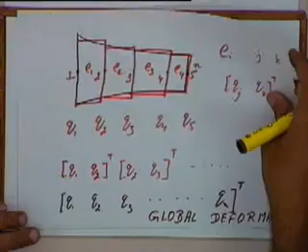So we will have one vector or one matrix which we will call as the global deformation matrix. So this matrix we will call it the global deformation matrix.

So if we have a set of elements like this, that is E1, E2, E3, E4 and so on, and let us say if we have m elements and n nodes, our global deformation matrix would be given by Q1, Q2, so on till Qn. This is our global deformation matrix.

Now for this matrix, for this set of finite elements, we can say that the element E1 is connected between nodes 1 and 2, the element E2 is connected between nodes 2 and 3, E3 is between 3 and 4, and so on.

So, let us say, this table is defining the adjacency relationship between elements and nodes. It is defining the position of different elements and that of the different nodes. We will be making use of this table later on.

If we take up the first element and we write down the stiffness matrix for this, the stiffness matrix for the first element is E1 A1 by L1 multiplied by 1 minus 1, minus 1, 1. Similarly the stiffness matrix for the second one would be E2 A2 by L2 multiplied by 1 minus 1, minus 1, 1, where E1 is the Young's modulus for element 1, A1 is the area of cross section for the first element, L1 is the length of the first element.

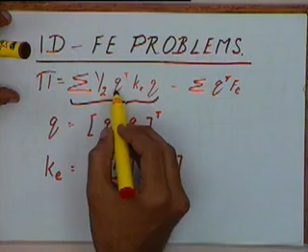And if you look up this term, the first term Q transpose Ke Q, if I expand it out, that is I multiply this matrix by Q transpose and Q, that is Q1, Q2, the terms Q1 and Q2 will be multiplying these two terms and then these two terms, because this will become a row matrix multiplied by this column and then multiplied by this column.

The product of these two will give me a row vector, and that row vector when multiplied by this column vector Q is going to give me a single potential energy term, or the strain energy term. So now what we will do is, instead of writing the individual matrices like this, I will write a global matrix which will look something like this.

What I have done is, if I look at this table, the element E1 is defined between nodes 1 and 2. I have a total of n nodes, so I will take an n by n matrix.

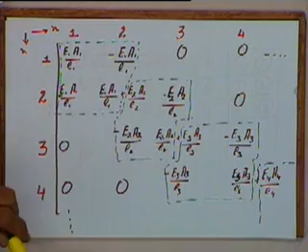And so on, I will take up the third element. The third element is defined between nodes 3 and 4. So I will take locations 3 and 4 of this matrix, and place the four terms for the element stiffness matrix for element number 3. This way I will fill up all these elements, the remaining places will get a 0. And this matrix is what we will call the global stiffness matrix.

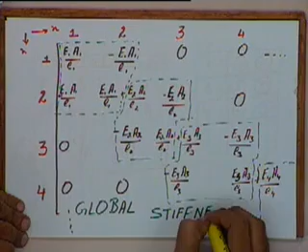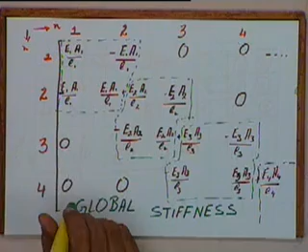Any question up to this point? How I have made this global stiffness matrix?

Now if I look at the global displacement matrix, which is this one, and the global stiffness matrix, which is this one, and if I write down the expression half of Q transpose K Q, where Q transpose is the global displacement matrix and K is the global stiffness matrix.

Basically what I am doing is I am taking this matrix, and I am pre-multiplying it by Q transpose and post-multiplying it by Q. What is Q transpose? It is a row vector containing Q1, Q2, Q3 till Qn. So this is going to be a row vector which looks like Q1, Q2 till Qn. This is multiplied by this huge matrix that I have written.

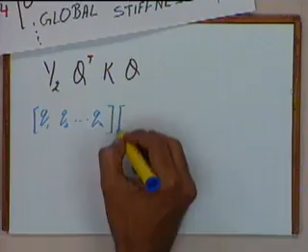In this place I will get this complete matrix, the global stiffness matrix, and this is multiplied by a column Q1, Q2 till Qn.

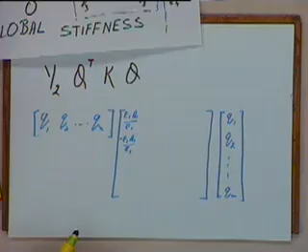Now if I look at this, my first two terms here contain E1 A1 by L1 and minus E1 A1 by L1, these two terms. All the other terms are zeros. So when I multiply this row by this column, I will get terms corresponding only to these two.

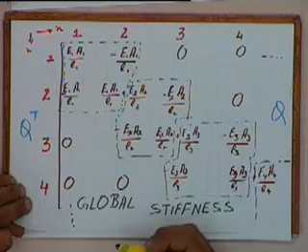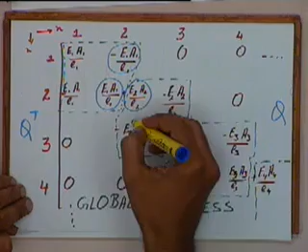Similarly if I take up the next column, I will get terms corresponding to this, this, this and this. Q1 will be multiplied by this, Q2 will be multiplied by this as well as by this, and Q3 will be multiplied by this. Then the product of this row with this column is going to be multiplied by Q1. You have to look at this operation slightly carefully.

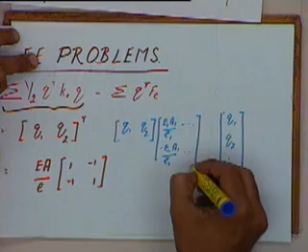And if I compare this with the expression half of Q transpose into KE into Q, that means half of this row vector multiplied by this column vector. I will again get Q1, Q2 multiplied by these two terms, and again that term will be multiplied by Q1. You can look at Q1, Q2, this would be multiplied by E1 A1 by L1, minus E1 A1 by L1. And we have another couple of terms over here, and this will be multiplied by Q1, Q2 as a column vector.

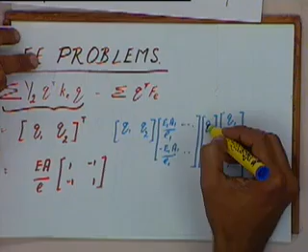So these two terms multiplied by these two, again multiplied by Q1, that is what will be my first term, and we will get the same term when I multiply this row by this column and then multiply that by Q1. Are you able to visualize that? Then what we are doing is I am summing it up over all the elements.

If the effect of this summation I am able to get directly by getting this global matrix, because if I take this row and multiply it by any column, let us say I multiply it by the ith column, and the ith node will be a part of some particular element, I will get the corresponding terms from this summation.

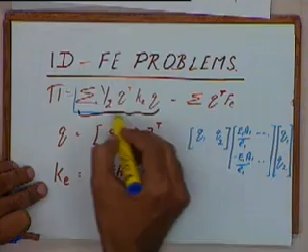Let us say if I take the element I, which is defined between nodes j and k, then the jth row and the kth row, and similarly the jth column and the kth column, these four terms will give me the terms corresponding to the element matrices.

So what I am saying is that this thing will be equal to sigma half q transpose k e q. So Ei is of the ith element. Again, what is Ei? The ith element. So the element Ei is defined between nodes j and node k.

If you look up this table, the element E1 is between nodes 1 and 2, E2 is between 2 and 3, and so on. So if I take Ej, or sorry Ei, that is between nodes j and k. Is that okay?

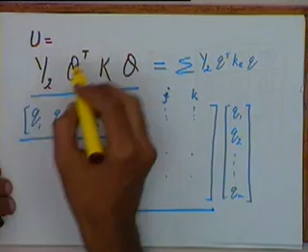So if I take any finite element formulation, any problem which I have defined as a set of finite elements, I can take each of these individual elements, get their elemental matrices - the element stiffness matrices and the deformations - and from these I can assemble my global equations, or my global expression by writing this term. This is equal to the total potential energy, strain energy in the system. U is equal to half of q transpose k q. This is the total strain energy in the system. Is that all right? Okay.

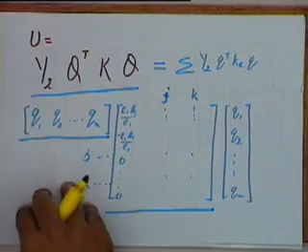Now the potential energy term consisted of another expression which is this q transpose into Fe. What we will do is, just like we have defined a global deformation matrix, we will define another term which is a global force matrix.

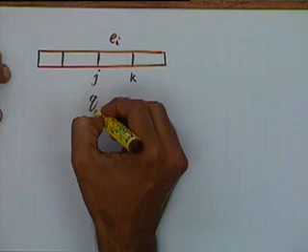So if we have a set of finite elements like this, let us say this is my element Ei between nodes j and k. The deformation of this is qj, the deformation of this is qk. We have written expressions for the Fe matrix, that is the element force matrix.

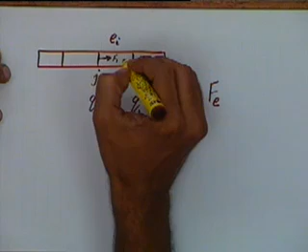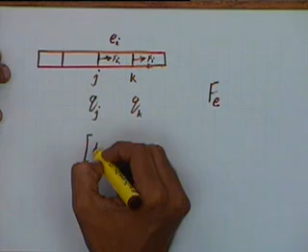What we said essentially was this element force matrix will consist of two forces acting at the two nodes. So this is, let us say, some force F1, or let me say Fi1, and this is Fi2. So the element force matrix for this would look like this: Fi1 and Fi2. This is going to be the element force matrix for the ith element.

So what we'll do is we'll define a global matrix in which, again, if I take my first element E1, that is defined between nodes 1 and 2, I will take the corresponding force terms for the first element and place them in locations 1 and 2. So F11 and F12. This is my element number 1, this is my node 1 and this is my node 2.

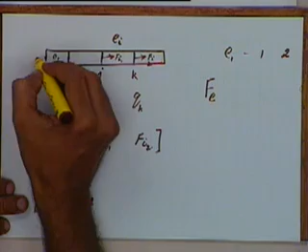This force is what I am calling as F11, and this force is what I am calling as F12. F12 is the force on the second node of element number 1. F11 is the force on the first node of element number 1. Fi1 is the force on the first node of element number I, and Fi2 is the force on the second node of element number I.

Okay, so if my element 1 is between nodes 1 and 2, and element 2 is between nodes 2 and 3, my second term here I will add F21, and the third term here will have F22.

This is location number 1, this is location number 2, and this is location number 3. Forces are also 1D. In the 1D formulation we assumed everything to be one dimensional. If you have a two dimensional element, we will see how to formulate that later on.

So here we talk about first node and second node, we don't say J and K. We have always been doing that. The first node here is node number J and the second node is node number K.

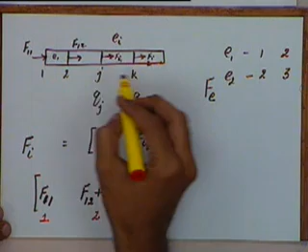If my first node is node number J, what I will do is I will take up the jth term over here, and in the jth term I will add Fi1. And in the kth term I will add Fi2.

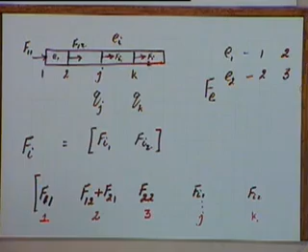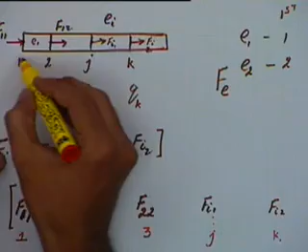See, the first and the second node, when I say this is my first node and this is my second node, this is what we refer to as the elemental numbering. Element has a local numbering which is nodes 1 and 2. These are the global node numbers. This 1, 2, J, K and so on, these are the global node numbers.

Now this global node number J corresponds to element node number 1 for element number I. That means for this element, this node number locally is 1 and this is local node number 2, but global number is J and K.

Okay, so when I look at the local matrices, in the local matrix, this is the first force element, this is second force element. In the global numbering, this will go into the jth location, this will go into the kth location.

This way what I will do is I will take up all my elements, and the forces coming on each of the nodes, the forces which are a part of the element force matrix, those forces I will place at these global locations. So at each of these n nodes I will get a force which will look something like this.

So if I have a set of forces like this, this matrix is what I call as my global force matrix. What I have basically done is I have taken up the force elements on each of the elements, the forces on the two nodes of each of the elements, and placed them on global locations. This matrix is what I call a global force matrix.

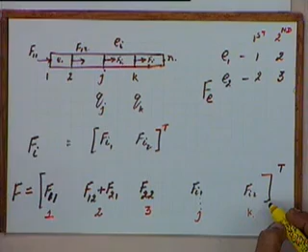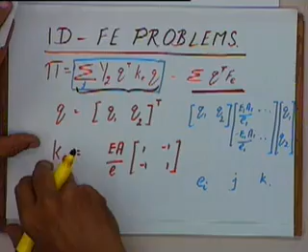And now if I look at this term, that is sigma q transpose Fe, you will find that this will be equal to Q transpose multiplied by F. How do we get that?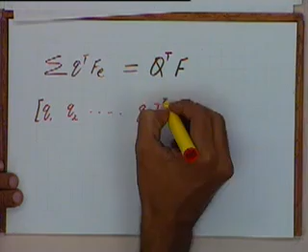This Q transpose is nothing but Q1, Q2 till Qn transpose. And this F would consist of F11, F12 plus F21, F22 plus F31, and so on.

What I have taken is element E1 defined between nodes 1 and 2, and element E2 defined between nodes 2 and 3, and so on.

So if I take this row and multiply it by this column, Q1 is multiplied by F11, Q2 is multiplied by F12, and these two terms are what I will get if I take the matrix Q1 F1, that means the Q matrix for the first element and F matrix for the first element. If I take these two and multiply them, I will get Q1 F11 plus Q2 F12.

Similarly, if I take up the second element, I will get Q2 and Q3 multiplied by F21 and F22. Similarly, if I take the third element, Q3 and Q4 will be multiplied by F31 and F32, and so on.

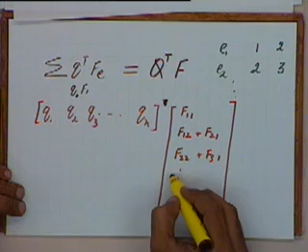The summation of all these terms is nothing but the Q transpose multiplied by F.

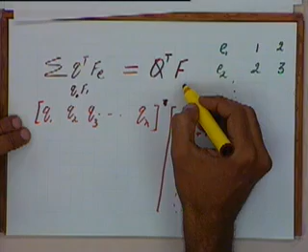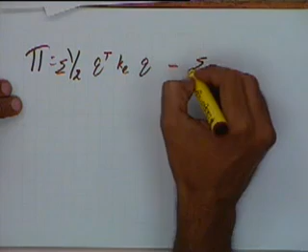So this way, by writing the global equation in this manner, the potential energy expression that I had earlier, I can simplify that to: pi equal to sigma half of Q transpose Ke multiplied by Q minus sigma Q transpose Fe. This is nothing but half of Q transpose K Q minus Q transpose F. This is the expression for the total potential energy in the system.

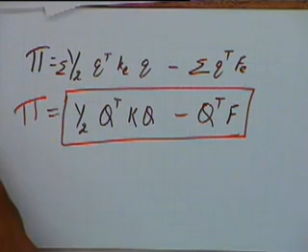And this has been obtained by writing the global deformation equation, global stiffness matrix, and the global force matrix.

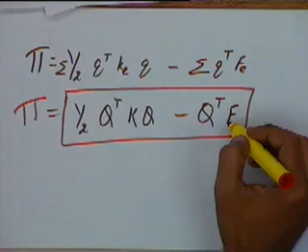Any questions up to this point?

Okay, a couple of observations about this global stiffness matrix. If you look at these element stiffness matrices, the first thing we notice is that they are all symmetric. 1, 1, minus 1, minus 1, 1, 1, minus 1, minus 1 - so all the element stiffness matrices are symmetric.

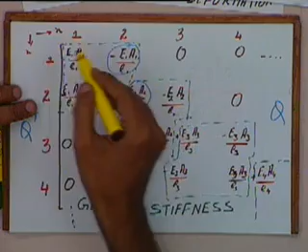If you see the method by which we have assembled the global stiffness matrix, we have retained the symmetry because the element stiffness matrices have been placed both as row as well as column terms. So if I take the ith column and the jth column, and the ith row and the jth row, an element defined between nodes i and j will come on the 4 symmetric terms. So the global stiffness matrix is also a symmetric matrix - K is a symmetric matrix.

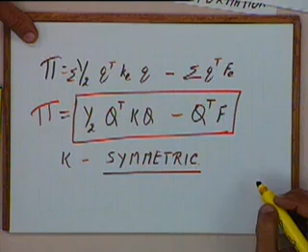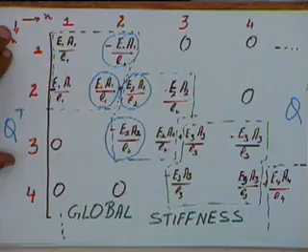The other thing we say is that if I have element 1 defined between nodes 1 and 2, element 2 defined between nodes 2 and 3, element 3 defined between nodes 3 and 4, and so on - that means element i will be defined between nodes i and i plus 1. If I follow this sequence, I will get only 3 terms in any row - the 3 consecutive terms next to the diagonal.

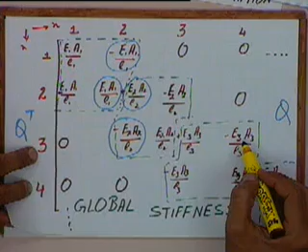If you notice here, element 1 is between 1 and 2, element 2 is between 2 and 3, element 3 is between 3 and 4. If I take up the third row, I will find non-zero terms only in locations 2, 3 and 4. So this global stiffness matrix will be a banded matrix with a bandwidth of 3. So if I take numbering like this, I will get a banded matrix, and the bandwidth will be 3 in this case - the width of the band.

However, if I don't do my numbering like this - say my element number 1 is defined between node number 1 and 10 - that means I am taking a set of elements like this. This is my element number 1, and instead of saying this is between nodes 1 and 2, I say this is 1 and this is 10. And this is maybe some other number 15, and this is node number 2, and so on.

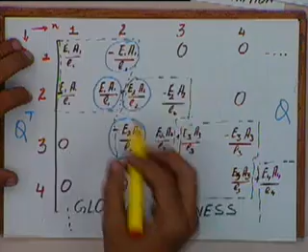Then what would happen is the terms for the stiffness matrix of element 1 will go in location 1 and 10. These 4 terms won't come like 1, 2 and 1, minus 1 and minus 1, 1. One will come here, and this term will go in the 10th column, and similarly this term will go in the 10th row, and this term will go in location 10, 10.

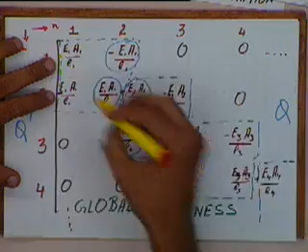And if that happens, this will no longer be a banded matrix. This matrix will then become non-banded, but will still be symmetric. But this will become a sparse matrix. There will be a term here and a term in the 10th row, in the 10th column, but all the terms in between will be 0.

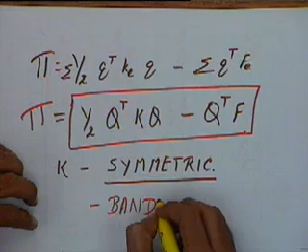So the global matrix that I have - this K is either banded or it is sparse. And whether it is banded or sparse depends on the numbering that we have done, how we have numbered the nodes. So numbering becomes very critical on whether it is a banded matrix or sparse matrix. It's basically critical because for banded matrices we can get very efficient methods for solving them, while if it is not banded and we have a very large system of equations, the system can become complex. So the numbering of the nodes is very critical.

The mid-terms are 0. What do you mean by mid-terms? I mean between 2 to 9.

Let's say this is node number 2 and this is node number 9. No, E1 is defined between nodes 1 and 10. So corresponding to E1, for the nodes 2 and 9, all the elements will be 0. That's why it's sparse.

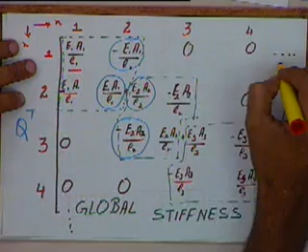Corresponding to E1, I don't understand what you mean. So if I look at this stiffness matrix, I'll get a term in this location and I'll get a term in the 10th location, but I won't get any term in any of these locations.

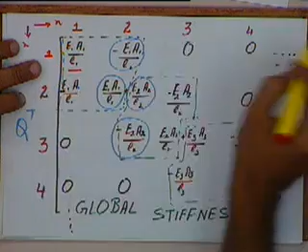Because this element 1 is defined between nodes 1 and node 10. But between nodes 2 and between node number 1 and, let's say, node number 2, there is no element. If there is an element between node 1 and node 2, then I will get a term in this location.

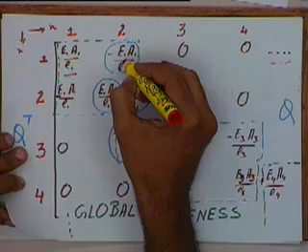Is that okay? See, if I have an element i between nodes j and k, in that case I will take the jth row, kth row, jth column and the kth column. Okay, in a one dimensional case like this...

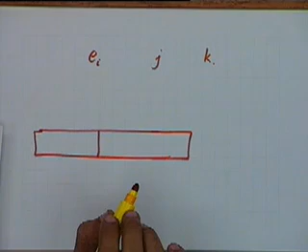One node can appear only between two elements. If this is my, let's say, node number j, it can either appear with this element or with this element. So one node can appear only in two elements.

If I take the first node and let's say if I am calling this node number 1, and this is connected to, let's say, node number 10, it cannot be connected to any of the other nodes since this is the first node I am taking. If 1 cannot be connected to any of the other nodes, all these locations will have to be zeros.

When will this term be non-zero? Only when there is an element between node 1 and node 3. Only then can this term become non-zero.

That is why between locations 2 and 9, all of them will become 0, because I have taken the first element between 1 and 10. This I have taken to be my element number 1. That is why all the other terms will become 0.

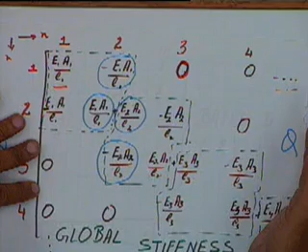Is that okay? Here if we put j equal to, in the previous one... put j equal to 2, then j equal to and k equal to? No, I mean somewhere down the element we will get j equal to 10 also. So what is the difference between that and this 10?

I didn't get it. I have taken some element which is between nodes 2 and some other number, let's say 9. Terms for this element will be defined between locations 2 and 9.

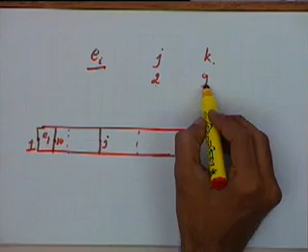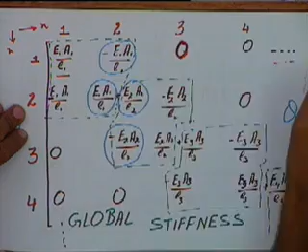So if I take the second row and the ninth row, and the second column and the ninth column, I will get a term here and I will get a term in the ninth column. I will not get a term here. I will get a term here only when I have an element between 2 and 1. Is that okay?

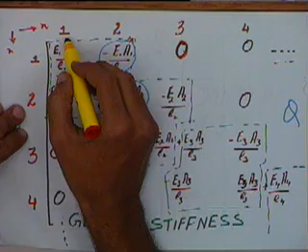That is why we say that this global matrix is always symmetric, and is either banded or sparse depending on the numbering that we have done. If our numbering system is efficient, then it will be a banded matrix with a small bandwidth, otherwise it will be a sparse matrix.

In fact, when you work on, let's say, a system like Patran or any other finite element package, you will find that the system first assembles the global matrices and then it tries to optimize on the numbering, because the numbering that you might do might be very inefficient. So you try to optimize the numbering and aim at getting a minimum bandwidth. At some stage you will find a message coming that says minimizing bandwidth or optimizing bandwidth, and that is basically done with the idea of making it a banded matrix with a small bandwidth.

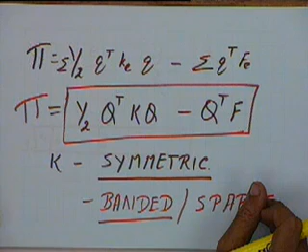So this is how the global matrices are assembled. Let's take a small example for this.

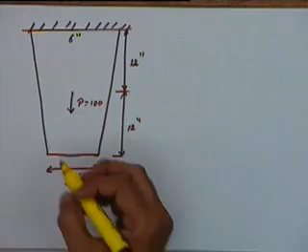Last time we had taken an example where we had taken a body like this and we had modeled this by two finite elements.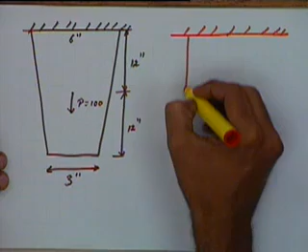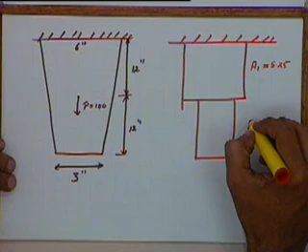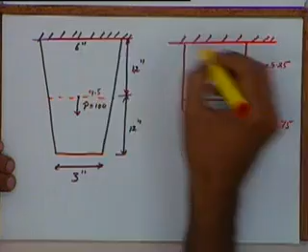For the first element we said we will take the area of cross section to be 5.25 square inches. For the second element we said it will be 3.75. Basically at this point it is 4.5. So this 5.25 is the mean of 6 and 4.5, and 3.75 is the mean of 4.5 and 3.

We have taken E to be 3 into 10 to the power 7 psi, which is also in pounds, and we have taken rho, density, to be 0.28 pounds per cubic inch.

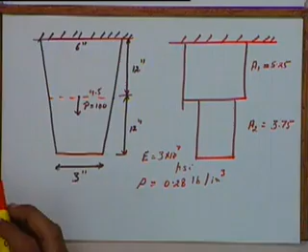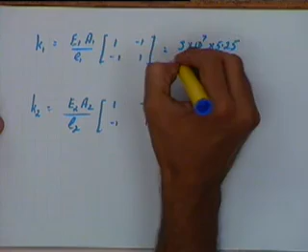For these we have written down the elemental matrices, that is K1 is equal to E1 A1 by L1 multiplied by the matrix 1 minus 1, minus 1 1, and K2 will be equal to E2 A2 by L2 multiplied by 1 minus 1, minus 1 1. So we had derived these matrices.

Now if we take the element force matrices, the total body force is the total weight acting, which is rho 1 A1 L1 — A1 L1 is the volume, rho 1 is the density — by 2 multiplied by 1 1. This will be the force matrix on the first element.

The second element will give us rho 2 A2 L2 by 2 multiplied by 1 1. Rho 2 A2 L2 is the total weight of the second element, divided by 2, so we will have half the total weight acting at each of the two nodes. Here also we have half the total weight acting at each of the two nodes.

If we put in the values, we will get this to be 0.28 multiplied by 5.25 multiplied by 12 divided by 2, times 1 1. This would be 0.28 multiplied by 3.75 multiplied by 12 divided by 2, times 1 1.

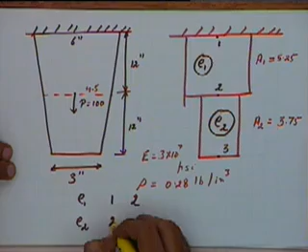Now from these matrices, let's derive the global matrices. I'll call this node number 1, this is node number 2, and this is node number 3. This is element number 1, and this is element number 2. So element 1 is defined between nodes 1 and 2, element 2 is defined between nodes 2 and 3.

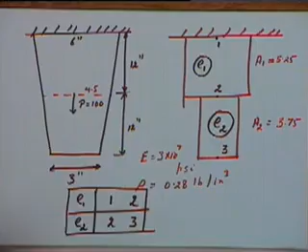Since I've got 3 nodes, my global stiffness matrix will have 3 terms in it. It will be a 3 by 3 matrix. So if I write down a 3 by 3 matrix, with rows and columns labeled 1, 2, 3.

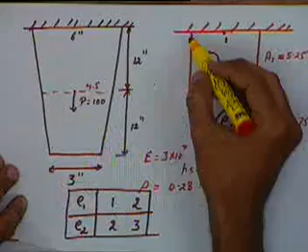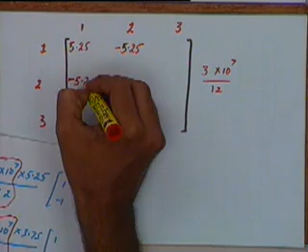The stiffness matrix for the first element will take locations 1 and 2 — this location, this location, this and this. So these four terms will come in these 4 locations. Now if I see both these terms, this part is common, so I'll leave it outside: 3 into 10 to the power 7 by 12. So I'll get a term of 5.25, minus 5.25, minus 5.25, and 5.25.

If I take the second element, that is defined between nodes 2 and 3, it will take locations 2 and 3 — the second row and third row, second column and third column — and in these 4 locations I'll put these 4 terms. So I'll get this plus 3.75, here a minus 3.75, minus 3.75, and a plus 3.75. So this matrix will be my global stiffness matrix.

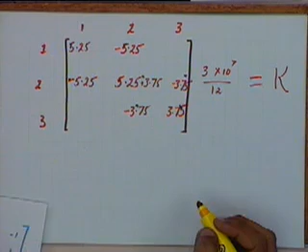My global force matrix will also consist of 3 terms, at locations 1, 2 and 3. Between locations 1 and 2, I'll get the force terms coming from the first element, that is this. And again between these two, I'll take this as common.

I'll multiply it by 0.28 into 12 by 2. Between 1 and 2, I'll get 5.25 and 5.25, and for the second element between nodes 2 and 3, I'll get this term of 3.75. So it will become this plus 3.75, 3.75.

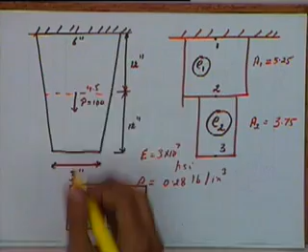In addition to this, we have a point load of 100 pounds acting at node number 2. So this point force will also be added here, so it will become this plus 100.

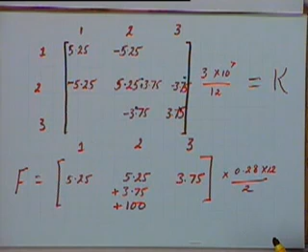We'll have to take the factor inside there. You will have to take the factor inside, fine. This term will come inside, that change you can make.

So this will be our global force matrix, and this is our global stiffness matrix. This is how we assemble the global matrices. Once we have assembled the global matrices, how to solve them, that we'll see in one of the subsequent classes.